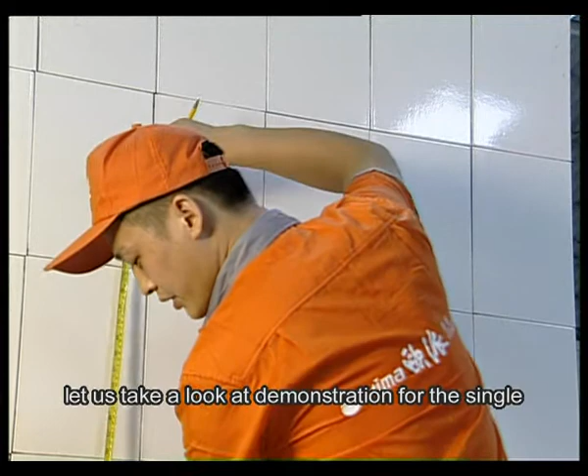1. Installation of wall cabinets. Before we install the full set of kitchen cabinets, let us take a look at a demonstration for the single wall cabinets and the single base cabinets.

In the drawing, you can see the hoisting height specified for the wall cabinet. When we install a wall cabinet, the height from floor should be hoisting height plus height of wall cabinet. Here, we set 1500 mm as hoisting height to calculate and draw the line for wall cabinet.

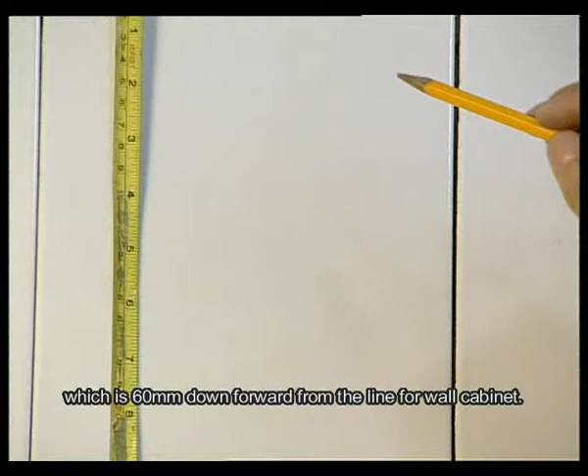After determining the height for the wall cabinet, next is to set down the width for wall cabinets. Next, we can set down the line for stationary seat, which is 60 mm down forward from the line for wall cabinet. Use some horizontal line or subject as benchmark to draw a parallel line for midpoint line of stationary seat.

The distance between the side of the stationary seat and that of the wall cabinet is 20 mm. Leave space for the side panel. Put the stationary seat at horizontal line and mark the center with pencil.

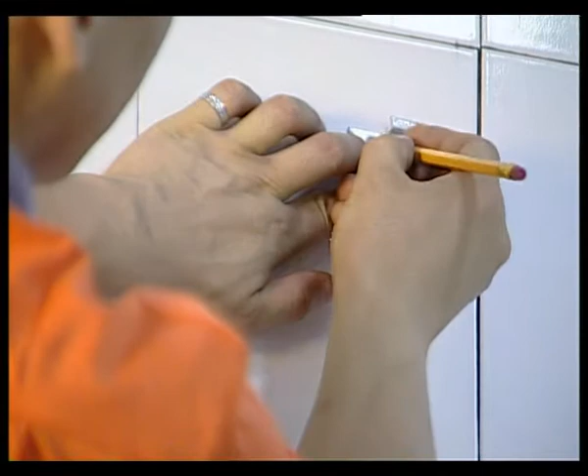After positioning the stationary seat, drill holes on the specified location with percussive drill. Be careful not to drill at high speed to avoid cracking on the tiles. Then insert the anchors and secure the hook with wood bolts.

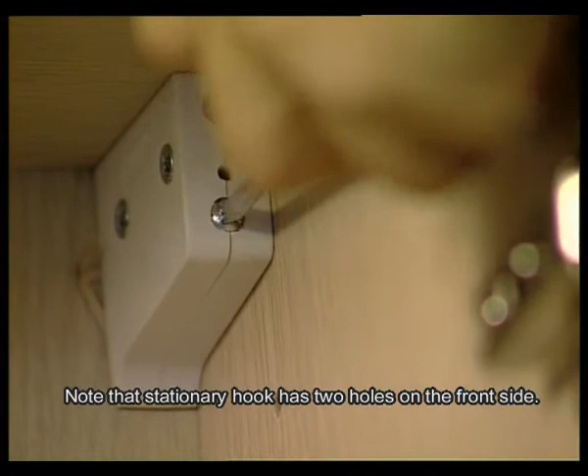Now, get out the hook of the wall cabinet. Note that stationary hook has two holes on the front side. The hole on top is used for adjusting the height, and the hole beneath it is used for securing the cabinet body. Mount the wall cabinet on the hook and fasten the cabinet with screws.

Afterwards, adjust the stationary hook. Use the tape to measure and adjust the level of the cabinet by the reference line. Use the same method to install the next wall cabinet. After installation, use the joining bolts to combine the wall cabinets together. In the end, adjust the door panels.

Installation of wall cabinets in kitchen when the height of the ceiling is below 2.3 meters. The wall cabinet can be installed very close to the ceiling. Take some horizontal line or subject as benchmark and use tape to check the level of the ceiling. If the ceiling is not leveled, use the shortest distance as reference.

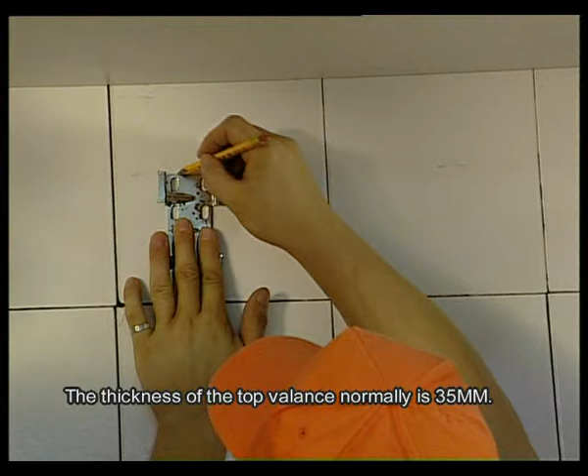Pay attention to the thickness of top valance when positioning the stationary seat and mark the line. The thickness of the top valance normally is 35 mm. Position the center point for the stationary seat by using tape to measure from the ceiling to 95 mm downward and mark the line. Please refer to the installation method of the wall cabinets for positioning stationary seat, drilling holes, and installation of the wall cabinet.

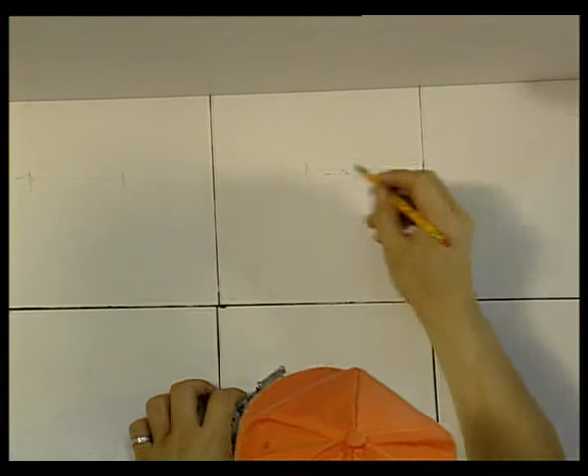Installation of wall cabinets. 1. The height of the positioning line for stationary hook of the wall cabinet is equal to the height of the wall cabinet plus the hoisting height, and then to deduct 60 mm. 2. To install wall cabinet with top filler and top valance, the position line for stationary hook is equal to the wall height minus the height for top filler, top valance, and 60 mm.

3. In case the distance between the floor and the ceiling is approximately 2.3 meters, mark the line for stationary hook downwards from the ceiling for 95 mm and mark the line. 4. No matter whether the hoisting height is specified on the drawings, it is required to communicate with the customer to confirm.

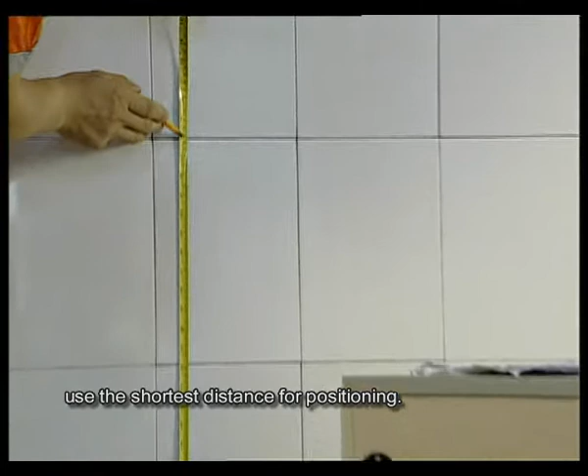2. Installation of base cabinets. After installing the cabinet feet seat, use tape to check the level of the floor. If the floor is not leveled properly, use the shortest distance for positioning. For domestic market, the height of the base cabinet is equal to the height of the cabinet body 680 mm plus the height of kickboard 110 mm.

Mark the positioning line for the cabinet height at a minimum distance. Then place the benchmark base cabinet at its designated position. Use some horizontal line or subject as benchmark to measure the level of the back of the base cabinet. Level the back of the base cabinet and place it against the wall. Adjust the front feet to make the cabinet flat.

Combination of the base cabinet. Use L-type as an example. 1. No matter whether the kitchen cabinet has one side or two sides leaning against the wall, we should take the cabinet against the wall as benchmark. 2. While measuring obstacles, pay attention that the measuring direction should be the same as the marking direction.

3. Assembly of full set kitchen cabinets. First of all, install the wall cabinet. On spot, check all positions for water supply, power and gas supply. Mark the positioning line for the stationary seat by referring to the installation of single wall cabinet.

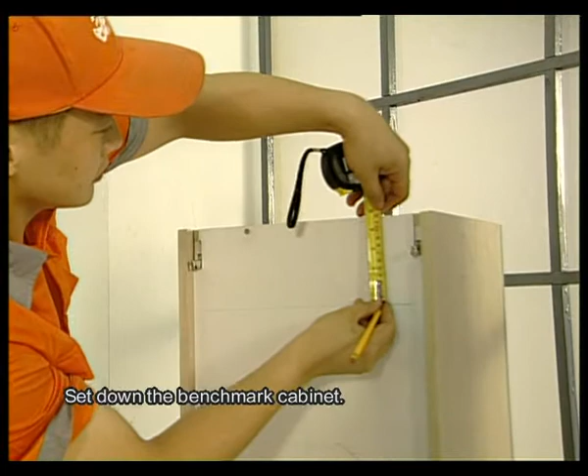Communicate with the customer to determine whether the pipes of water, gas, and electric cables are passing across the marked lines or opening on the obstacles to let them go. After assuring there are no pipes or cables passing through, we can start drilling holes and installing mounting parts. Set down the benchmark cabinet. Then we can open the hole for the gas gauge.

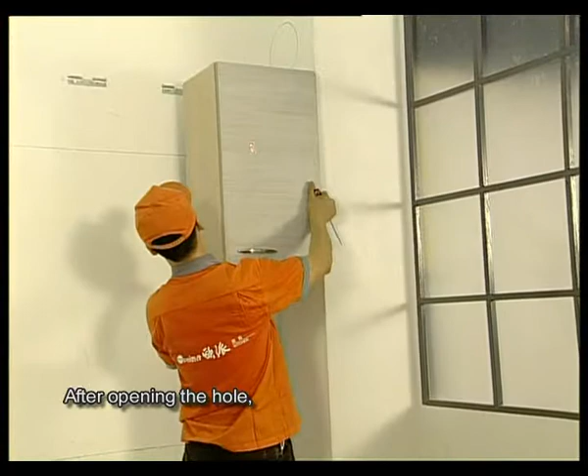After opening the hole, install the benchmark cabinet and fasten it. Adjust the level of the cabinet. Put the adjoining wall cabinets in place according to the drawing's instructions and leave space for the range hoods.

Use some horizontal line or subject as benchmark to adjust level for all cabinet bodies. Then open the hole for the microwave socket. Mark the line for the socket hole on the back panel and use the jigsaw to cut along the marked line.

Mount the wall cabinet and level it. Connect them with jointing bolts.

There are two methods to install a wall cabinet: stationary hook or nail. It depends on whether the wall is solid or not to adopt the stationary hook or nail. In case of nailing to install, the reinforcement panel is made of the same material as the cabinet body. Mark the line on the back panel and at the marked line drill 4 holes on the back panel. Use a percussive drill to enlarge the holes.

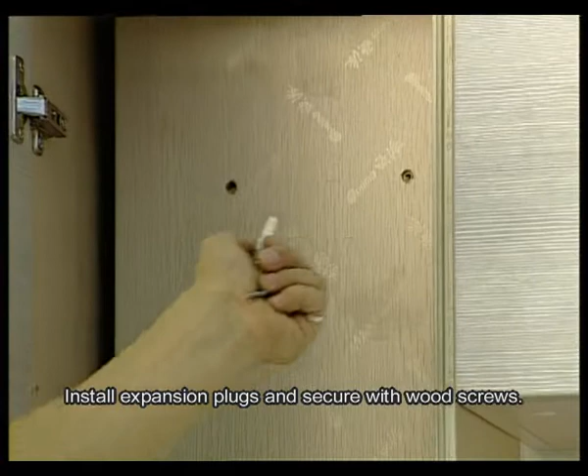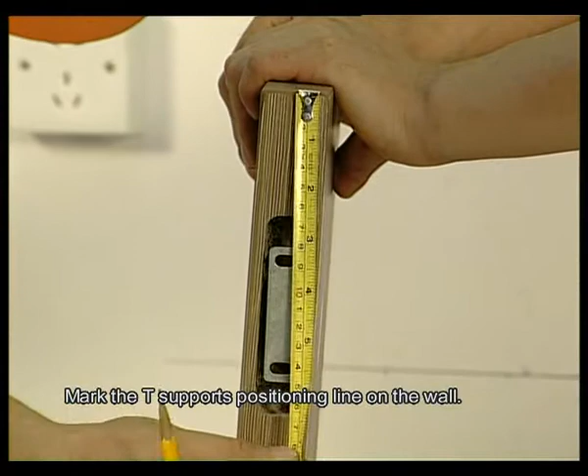Install expansion plugs and secure with wood screws. Installation of shelves. Install the T-supports in the hole of the shelf and measure the hole position of the T-supports with tape. Mark the T-supports positioning line on the wall, then drill holes and secure it.

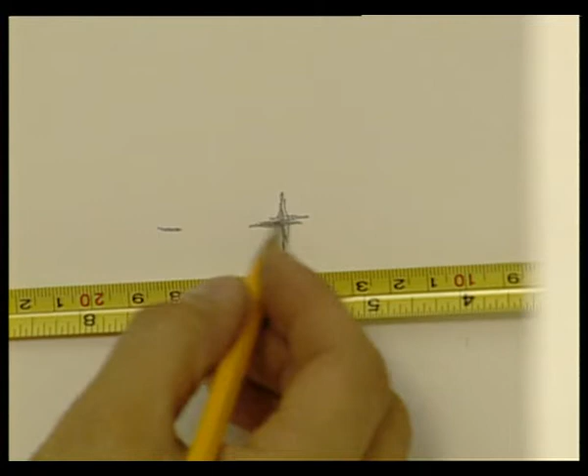Installation of glass shelf. Please refer to installation of shelves. Firstly, mark the positioning line and drill holes. Fix the glass clamp and put the sticker on it. Place the glass in the middle of the clamp and secure the glass with screws on the bottom.

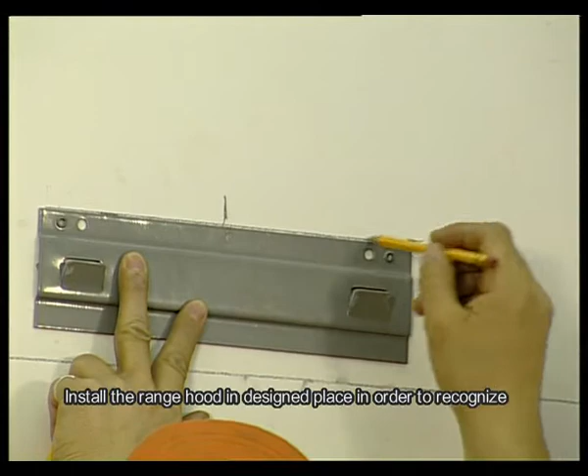Install the range hood in the design place in order to recognize the midpoint for the stove after installation of the countertop. Installation of base cabinets. Use shape L as an example. First of all, we need to check the level of the floor. If the floor is not level, set down the height line for the base cabinet at the minimum distance with reference to the installation of a single base cabinet.

For an L-shaped kitchen cabinet, use the corner base cabinet as benchmark in case both sides are not leaning against the walls. Place the corner cabinet at the corner and use some horizontal line or object as benchmark to adjust the level of the cabinet body.

After adjusting the benchmark base cabinet, place and adjust the adjoining corner cabinet. Place the adjoining cabinets in side A according to drawing instructions and adjust their levels.

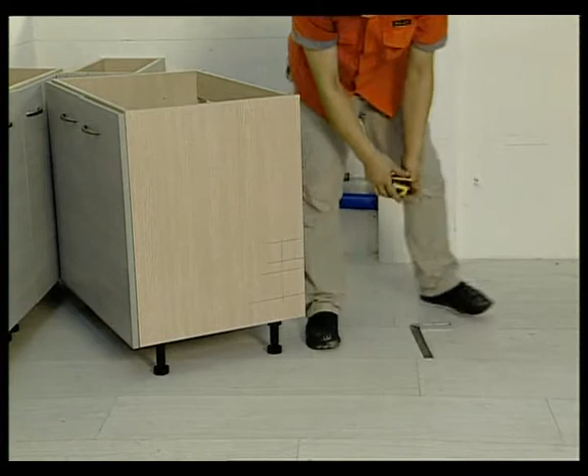Use a jigsaw to cut along the line.

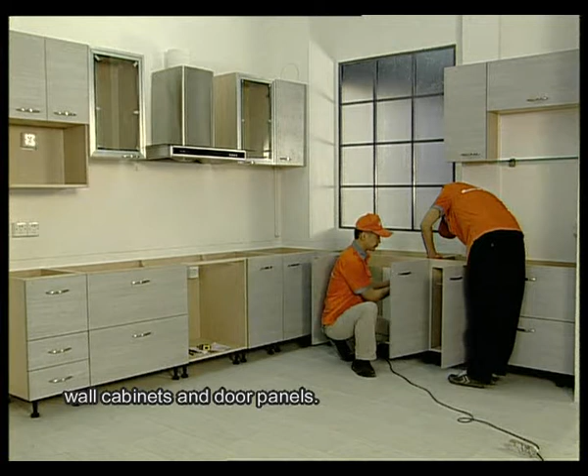The door panels can be adjusted in 3 directions, but mainly adjusted through the 2 holes on top of the hinges in order to make the bottom of the door panels level with the bottom panels of the cabinets, to ensure the surface is flat and the seam clearances are even.

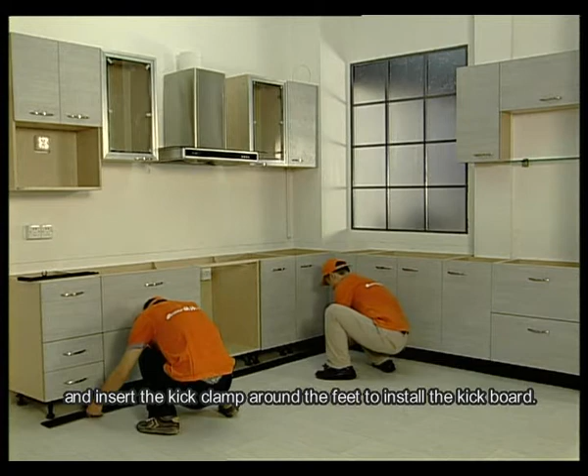Afterwards, clean up the bottom of the cabinet with a broom and insert the kick clamp around the feet to install the kick boards. Installation of countertop. Open the packaging of the countertop and use tape to check that the dimensions of the countertop meet the dimensions of the site.

Check the notch of the countertop. And use a straight corner ruler to check if the obstacle at the position of the notch is a right angle. Use tape to check the tilting dimensions. In case any place needs cutting, mark the line on the notch and use a corner grinder or jigsaw to cut along the line. Be careful to put on a mask and gloves while grinding and cutting.

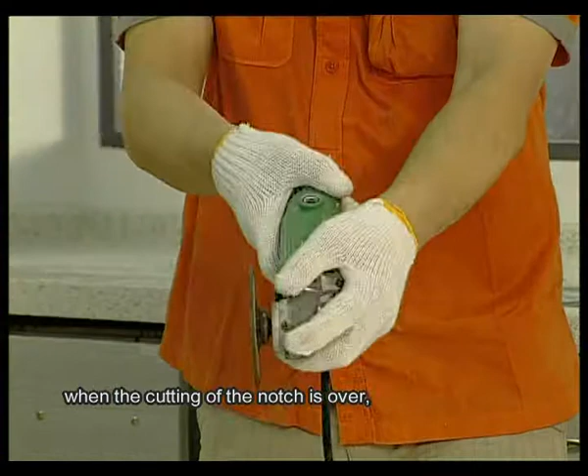Grinding of the benchmark countertop. When the cutting of the notch is over, place the benchmark side of the countertop on the base cabinet and grind with a corner grinder. The worker should keep a distance from the countertop while grinding. Use the grinder to grind from the back to the front. It is best the worker does not move, with one hand holding the grinder and the other hand switching on the power. The eyes of the worker, the countertop, and the grinding wheel form one line, and grinding will be vertical along this line.

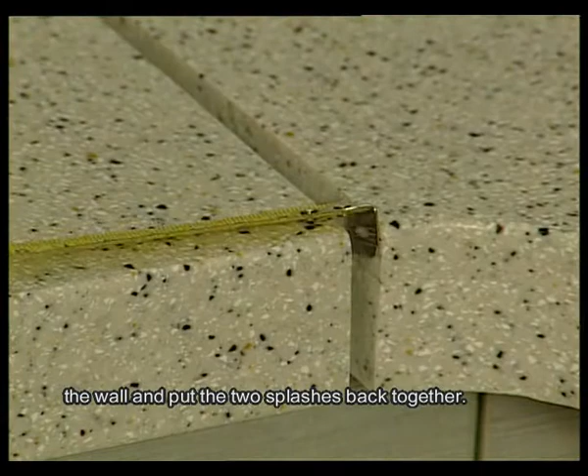When the benchmark side of the countertop joins with the jointing side, in case the clearance between the splashback of the countertop and the wall is larger than 5 mm, use the following method to adjust. Place the 2 countertops tightly against the wall and put the 2 splashbacks together. In this way, the 2 countertops will have clearance at the front side.

Measure the clearance of the front and mark the clearance dimensions at the splashback. Mark along the front end and the marks at the splashback. Cut along the line. In this way, the clearance between the countertop and the wall can be eliminated to an extent.

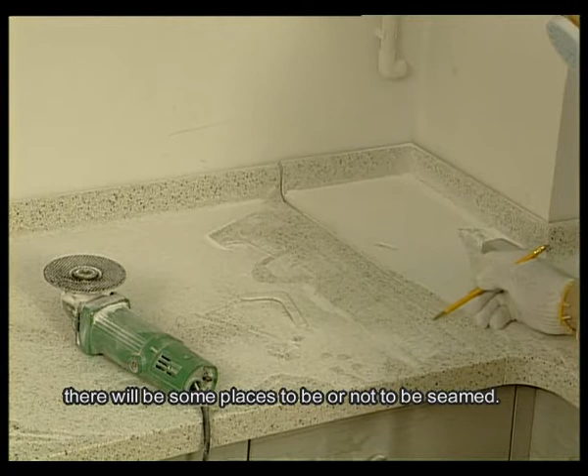Grinding and repair of the jointing seam. Use the benchmark side of the countertop as a standard and joint it with the other countertop. As the joint sides are not flat, there will be some places seamed and some not. Mark the seamless places with pencil. Use a corner grinder to grind and repair until all seams are eliminated.

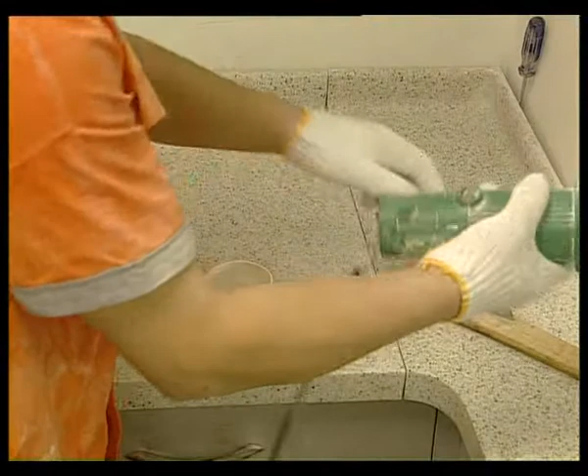After grinding the joint sides, use knife to remove the marks made by pencil. Then mix the glue with the hardener. According to our experience, a half cup of glue should be mixed with half a spoon of hardener. Then properly mix them. Be careful that the cup and the knife should be kept clean.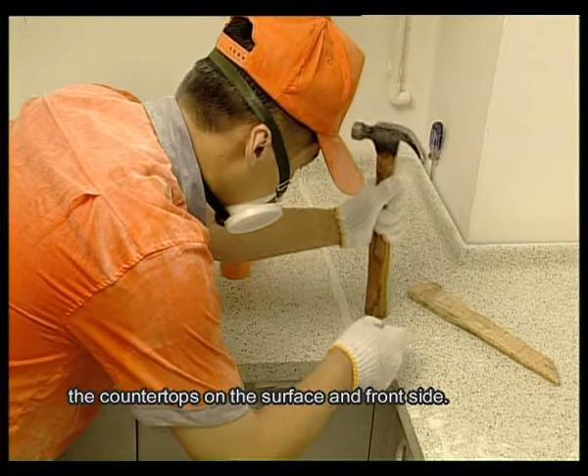Jointing and adjustment of the countertop. Apply the glue to the joint seam and use knife to move and ensure the glue is applied evenly. Be careful that paper should be placed on top of the door panels to avoid glue dripping on them. In addition, pressure should be added. Then, use hammer to adjust the level of the countertops on the surface and front side.

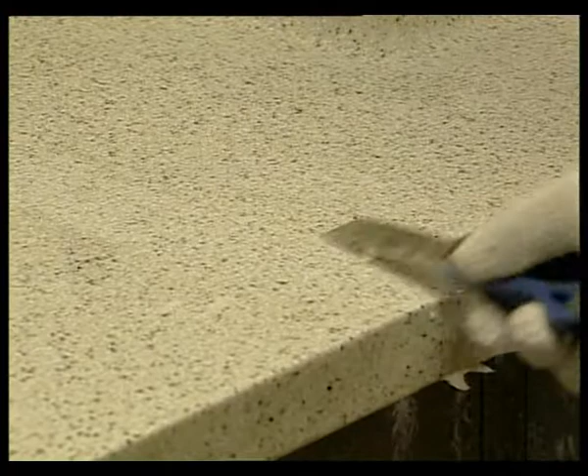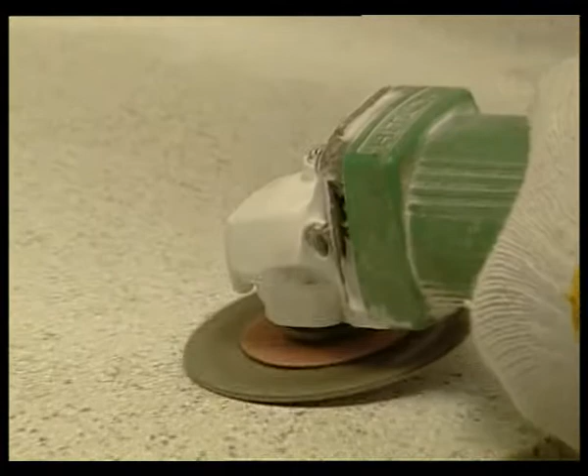When the glue becomes dry, use knife to remove excessive glue on the countertop in order to grind. Use sand wheel to grind first, and then use cutting wheel to polish until the grinding marks of the sand wheel are gone. Use sandpaper number 150, number 400, and number 1200 to sand with water until the surface of the countertop is smooth.

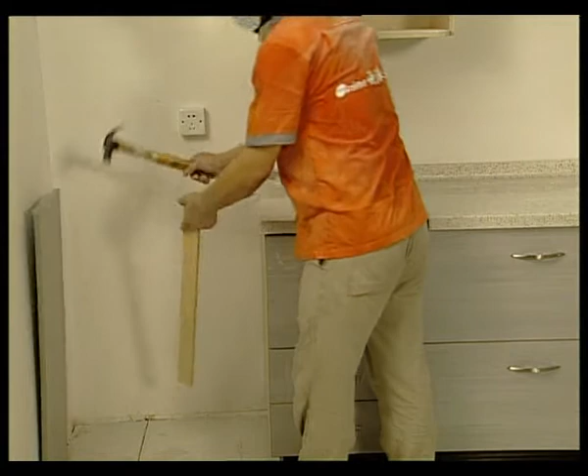Use polishing machine to polish. Apply wax on the countertop and polish with a polishing machine until the surface finish at the countertop joints becomes the same as other surfaces. Opening for the stove. Mark the center line for the stove on the countertop according to the center of the cooker hood.

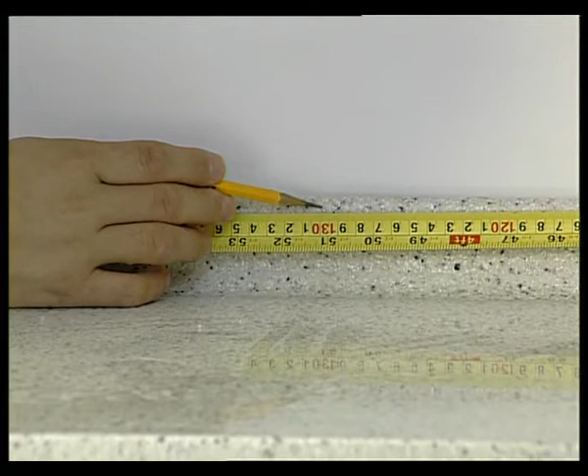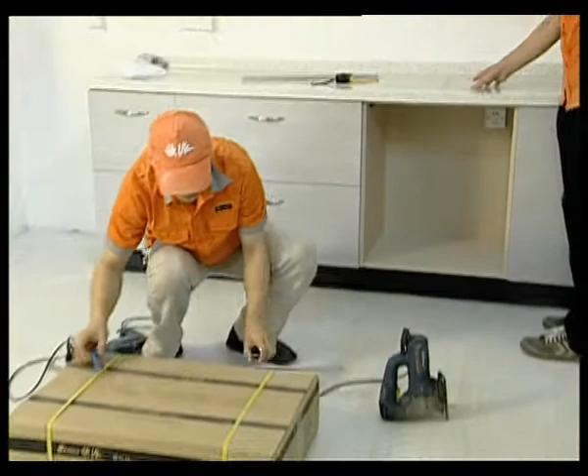Go in 100 mm from the front side to mark the front line for the stove. Open packaging to take out the stove paper sample, with the front side to line up with the front of the stove marked on the countertop.

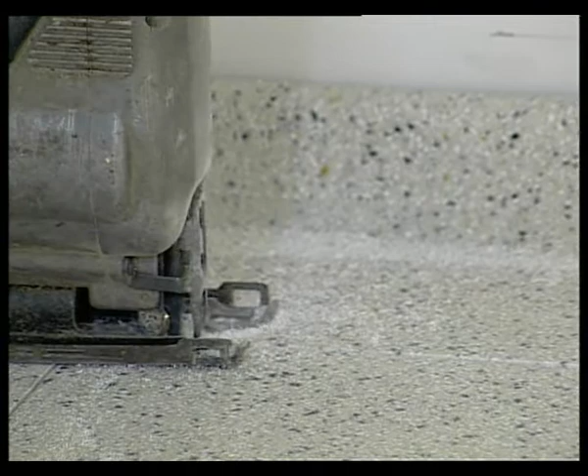Use straight drill to drill holes within the line. Use jigsaw to cut opening along the line. Then, use corner grinder to repair the opening. Use 120 by 120 boards to reinforce the sides of the stove opening and use 25 boards to reinforce the 4 sides.

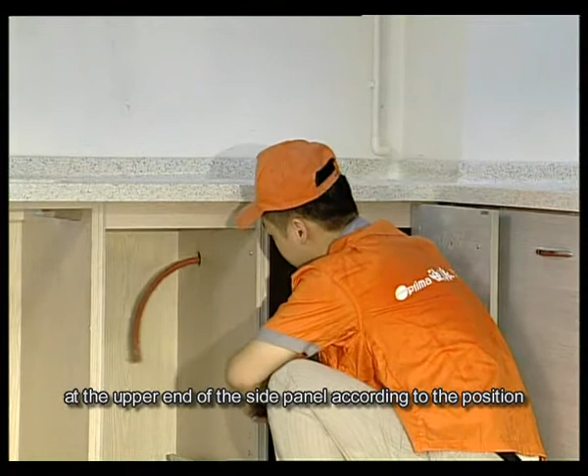When the stove opening has been repaired and reinforced, use 35 mm hole opener to open holes for the gas hose at the upper end of the side panel according to the position of the gas supply and the cooker top. Insert the hose to connect with the stove. It is best that professionals undertake this job. In the next step, we will clean the wall cabinet, the base cabinet, and the countertop with brush. Afterwards, scrub with towels. Use broom to clean the floor.

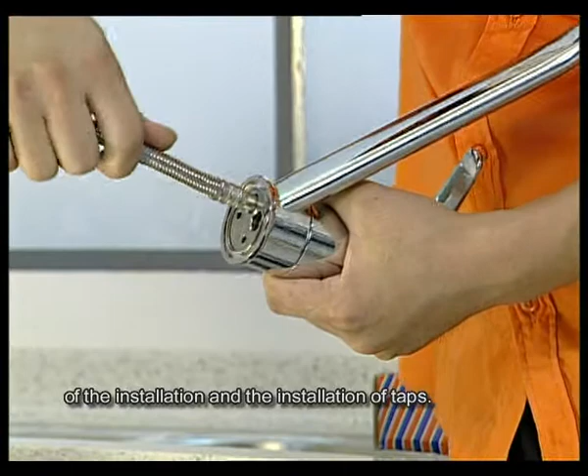Next, we will introduce to you the final processes of the installation and the installation of taps. Firstly, assemble the taps and ensure they are properly sealed with no water leakage. Install the taps at the places of the sinks and tighten with threads from the lower ends. Connect the water supply pipe with the taps and tighten them. The installation of taps is completed. Installation of soap extrusion.

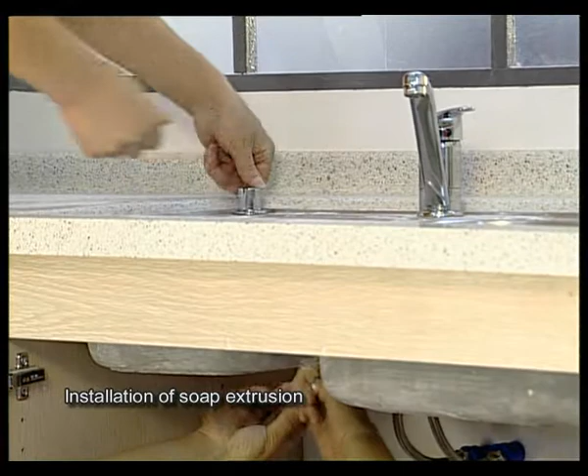To install the drainage, pay attention to the jointing of pipes. Rubber seal should be applied to the joints to prevent leakage. Firstly, install the 2 fillers at the lower ends of the sink and connect the overflow of the bib tap.

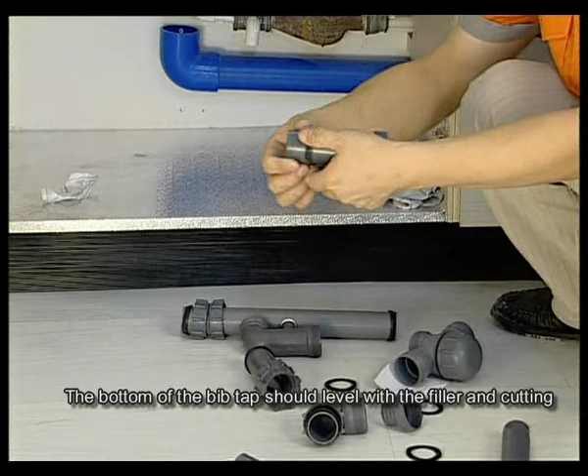Then, connect all parts of the drainage. Install the bevel rubber ring on the joining pipes and pay attention to the directions of the rubber rings. The bottom of the bib tap should level with the filler, and cutting will be required if they are too high or too low.

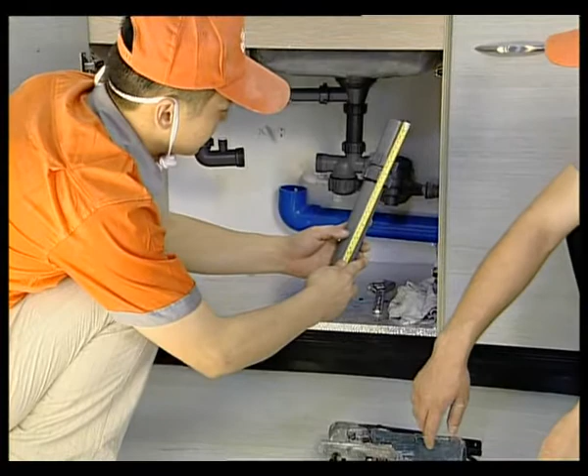After installation, insert the hose of the drainage into the drainage pipe. In case it is required to cut an opening to install a basin above the countertop, please refer to the processes for cutting the stove opening. Installation of countertop. 1. Clean the joining seam of the countertop. 2. The vessels used for mixing the glue must be kept clean and free of dirt. 3. Make sure there is no notch at the joining seam, since a notch will prevent the countertop from being polished.

4. The solidifying time for glue varies in different seasons. It takes approximately half an hour in summer and approximately 1 hour in winter. 5. Use corner fastener or silicone to secure the countertop with the cabinet body in order to adjust or prevent the countertop from deformation. 6. Follow the company standards to reinforce the opening area of the cooker top. 7. Go in 100 mm from the front of countertop to mark the position for the cooker top opening.

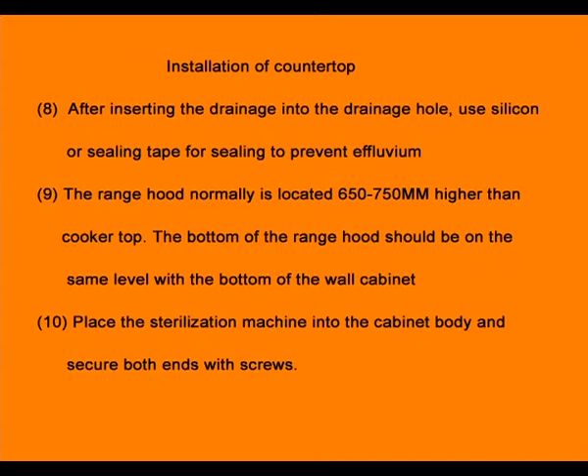8. After inserting the drainage into the drainage hole, use silicone or sealing tape for sealing to prevent effluvium. 9. The range hood normally is located 650 to 750 mm higher than the cooker top. The bottom of the range hood should be on the same level with the bottom of the wall cabinet. 10. Place the sterilization machine into the cabinet body and secure both ends with screws.

To allocate the installation and cooperate with each other is a must for the smart business operation. General procedure is the same for operation, but a little bit of difference should be specified for each installation. The staff will find the privity during installation to be efficient and professional. Hereby, we give out an instance to see how the staff work together to install the kitchen cabinets.

1. Assembly of base cabinets. Open the packaging and place all panels in order. The installation technician and the workers should work together to install the jointing parts on the side panels. The installation technician should mark lines according to the dimensions of drawer front and install slide rails on the drawers.

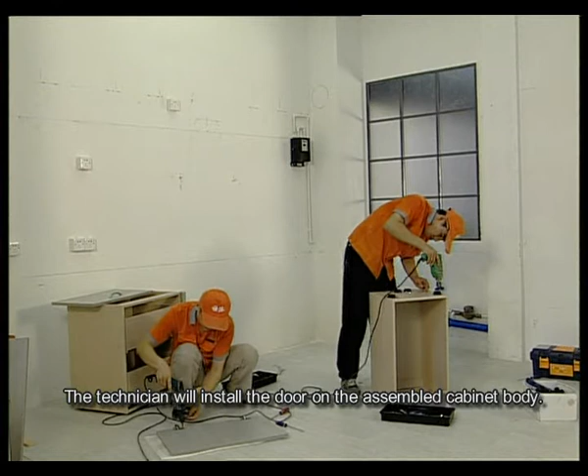Afterward, the workers assemble the cabinet body according to the drawing. The technician will install the door on the assembled cabinet body. At the same time, the worker can install the adjustable feet seat.

2. Assembly of wall cabinet and base cabinet. The technician moves the assembled base cabinet into the kitchen and starts setting down the height for the base cabinet and to combine the cabinets. Meanwhile, the worker can start assembling the wall cabinets after finishing the base cabinets.

After installing the base cabinets, the technician will start setting down the lines for stationary seat, then drill and fix the hook to install the wall cabinets. After installing the wall cabinets, the worker should clean up the kitchen.

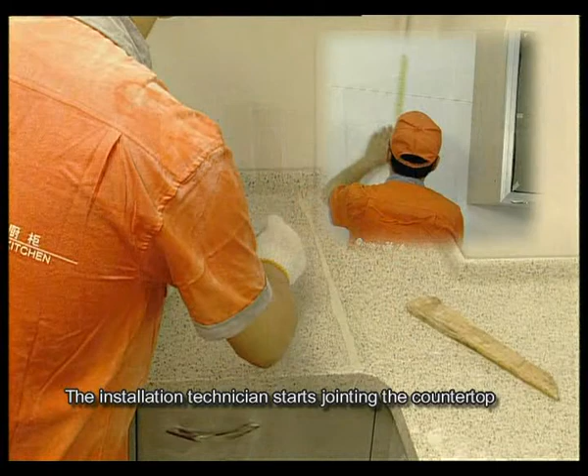3. Installation of the countertop. The technician and worker open the packaging for the countertop and lay the countertop on top of the base cabinet. The installation technician starts jointing the countertop, while the worker starts installing the range hood after he has cleaned up all the packaging derelict.

When the glue becomes dry, the technician will remove the extra at the joints. Afterwards, he will start to polish the surface. The worker will install the tap on the sink and tighten it. Afterwards, he will connect it with the pipe. After installing the tap, the technician and worker will install the drainage and the soap extrusion on the sink.

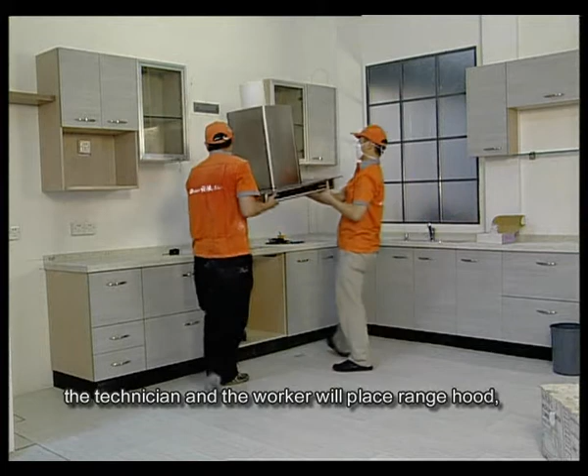4. Adjustment and cleaning for door panels. In the next step, the technician adjusts door panels while the worker will start cleaning. When the above-mentioned processes are completed, the technician and the worker will place the range hood, the sterilization machine, the stove, and the microwave at the specified positions. The installation is completed.

Improper operations can affect the quality of installation and can also damage the image of the company among the customers. Every installation staff should pay attention that the following performances are not acceptable. 1. Smoking in customer's kitchen when doing installation. 2. Chatting and laughing loudly during installation. 3. Standing on countertop for operations.

4. Keeping the tools out of order to be inefficient. 5. Placing the tools on countertop. 6. Not wearing uniform during installations. 7. Bolts and nails splashed around on the floor. 8. Not doing some cleaning before they leave.

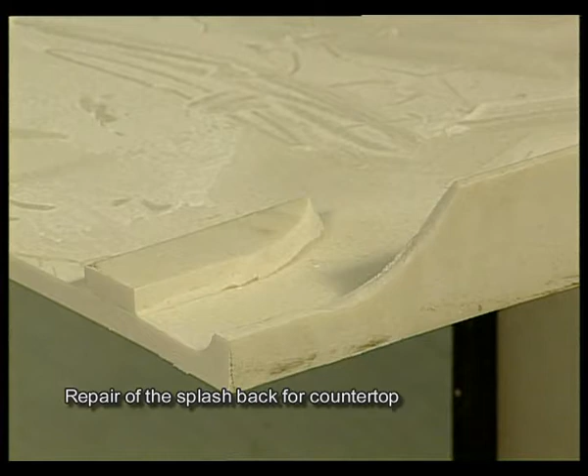Repair of splashback for countertop. In case splashback is broken, do not touch the broken edges by finger to avoid pollution. Use the same glue and condensate as what we used before to adhere the broken parts and pressure them together. When the glue becomes dry, use knife blade to remove excessive glue. Polish it with sandpaper for the first time and then use polisher and polishing wax to polish the surface.

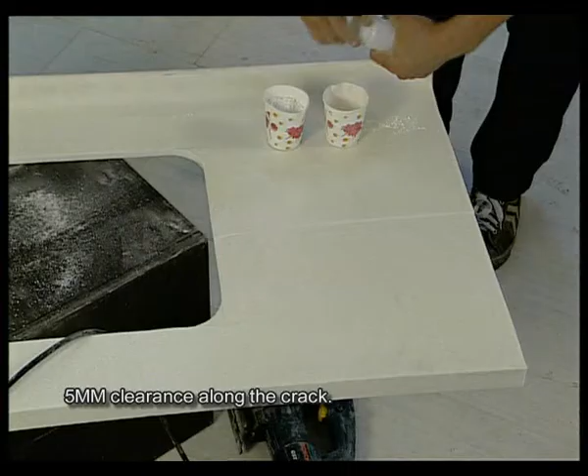When cracks happen in the center or edge of the countertop, firstly, use the corner grinder to cut a 5 mm clearance along the crack. Then use glue, powder, and condensate to mix and fill it into the clearance. When the glue becomes dry, use knife blade to remove excessive glue on the surface. Polish it with sandpaper for the first time and then use polisher and polishing wax to polish the surface.

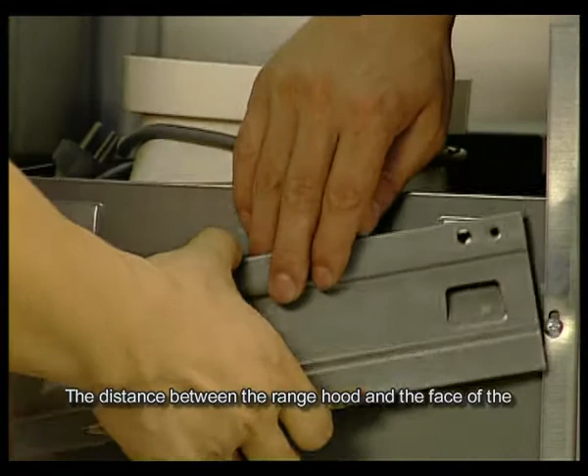Installation of range hoods. The distance between the range hood and the face of the stove ranges from 650 mm to 750 mm. When the kitchen cabinet has been installed, put the hook on the cooker hood. Measure the height of the hook and mark the center line at the space saved for installing the range hood.

The center of the hook is aimed at the center point of the center line. Set down the position and mark the point. Secure the hook on the wall before installing the range hood. Connect the power to the range hood and install the smoke extraction pipe.

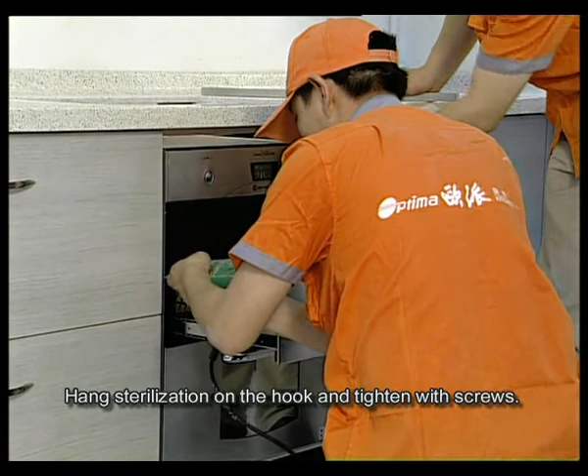There are two types of sterilization machines, which are wall hanging and built-in. In case of wall hanging, position the hook and drill holes to secure the hook on the wall. Hang the sterilization machine on the hook and tighten with screws. In case of built-in style, place the machine in the designed cabinet. Pull out the door of the sterilization machine and we can see a screw hole on each side. Apply screws to secure it.

Installation of stove. Installation of the microwave. Put the microwave into the cabinet and connect power to it.